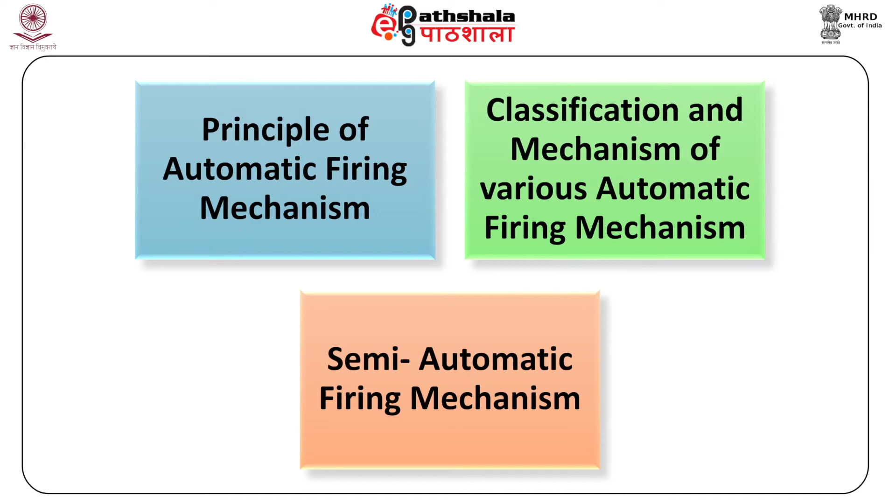After studying this module, you shall be able to know about the principle of automatic firing mechanism, classification and mechanism of various automatic firing mechanisms, and the semi-automatic firing mechanism.

In the older times, the firearms were muzzle loaders in which the projectiles were loaded manually from the muzzle end, and the whole projectiles, which were usually spherical in shape, used to coast out of the barrel and left no residual casings known as cartridge cases.

These initial weapons could have been little more than metal contraptions, being inept, sluggish to fire, and difficult to target. In addition, rain or humid weather conditions had an adverse effect on the priming charge, making it unmanageable to ignite. But as the development of firearms materialized, the cartridges started to be loaded by other mechanisms which were not manual.

The power to operate an automatic breech must obviously be self-contained within the weapon and comes from either the push of the recoil, that is, the direct utilization of the gas pressure on the head of the bolt, or the expansion of powder gases, and it is stored in springs for the performance of the counter-recoil and loading operations. Principle of automatic firearms.

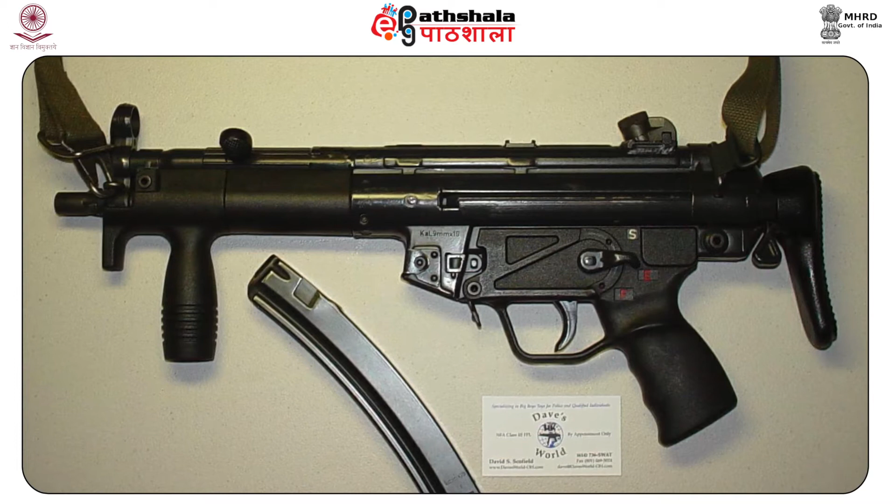As soon as the trigger of the firearm is pressed, it releases the hammer or the striker with considerable force. The striker compresses a pressure-sensitive material contained in the percussion cap. This generates a hot piercing flame which ignites the propellant charge. The charge quickly transforms into gas.

Due to limited space in the cartridge, the large volume of the gas so produced develops a very high pressure. The pressure so developed forces out the bullet or the shot charge through the barrel towards the target. While the bullet moves forward, the cartridge case is pushed backward. The case therefore comes in contact with the firing pin and the breech face of the breech block and picks up marks from the surface.

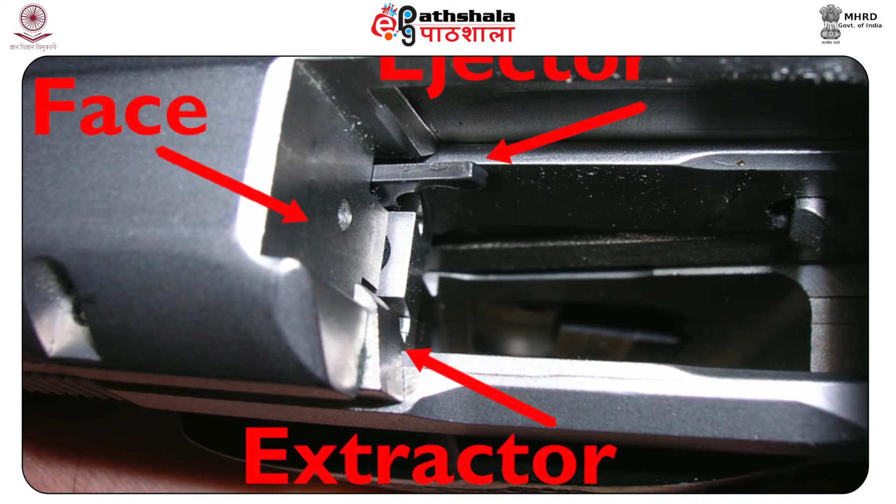The cartridge also expands due to the tremendous pressure developed in it, comes in intimate contact with the chamber, and sometimes may carry chamber marks. The fired cartridge case is extracted out of the chamber by an extractor and then ejected out of the gun by an ejector. In the process, both extractor and ejector are likely to leave marks on the cartridge case.

In a semi-automatic action, the mechanism automatically extracts and ejects the fired cartridge case and loads another from the magazine into the chamber, thus making the weapon instantly ready to fire another cartridge practically as soon as the preceding cartridge has been discharged, but does not fire it. To fire, the trigger must be released and then pulled and pressed for each and every shot.

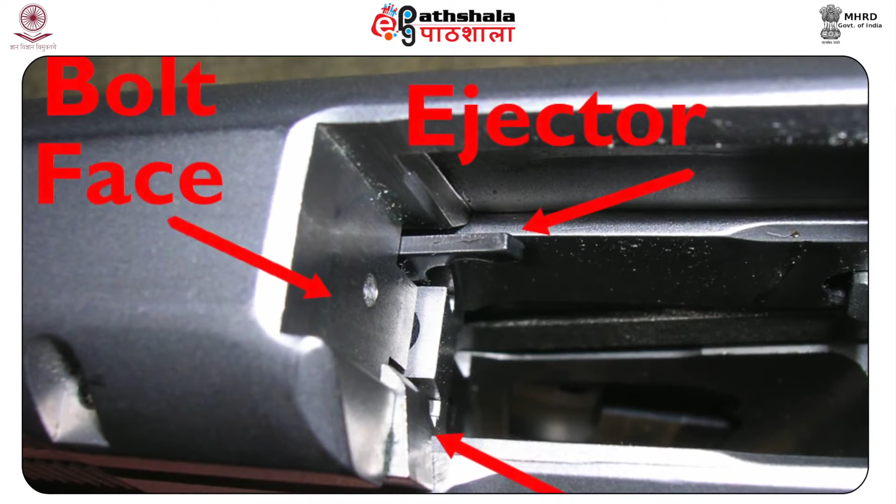On the other hand, an automatic action is one which continues to fire as long as the trigger is kept pressed. Thus, an automatic firearm is one that loads, fires, extracts, ejects, and reloads, continuing the cycle as long as the firing mechanism is held in the proper position.

Classification of automatic firearms. Blowback action mechanism. In blowback action, there is a heavy breech block. It moves backwards and forwards in a receiver attached to the barrel. It is not locked to the barrel.

There is a strong spring behind the breech block called the counter recoil spring or return spring. When a cartridge has been loaded in the chamber and during firing, the breech block is not locked to the barrel.

Before we discuss the operations of these mechanisms, let us consider for a moment the gas pressure inside the barrel. When a cartridge is fired, the pressure rises to its peak value. When the bullet is moving forward inside the barrel, the gas pressure goes on reducing, and when the bullet is just about to leave the barrel, the gas pressure is about one-fourth of the maximum pressure.

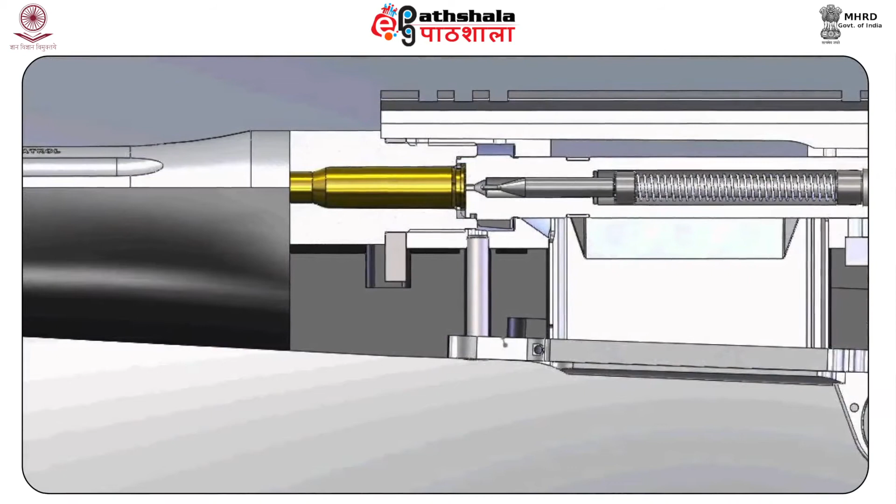When the bullet has just left the barrel, the pressure in the barrel reduces to 0, but for a moment there is some pressure inside the cartridge case which is called the residual pressure. In bolt action firearms, the bolt closes the rear end of the barrel and can be locked to the barrel during firing. But in blowback action firearms, the heavy breech block is not locked to the barrel during firing.

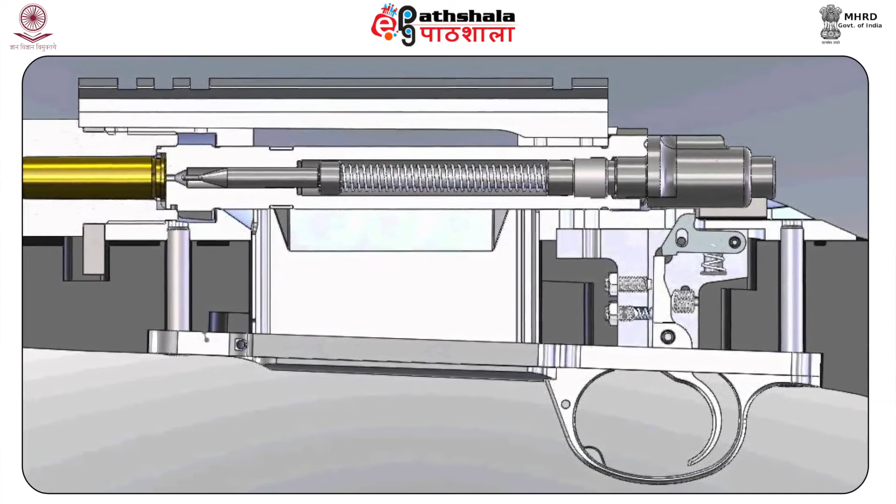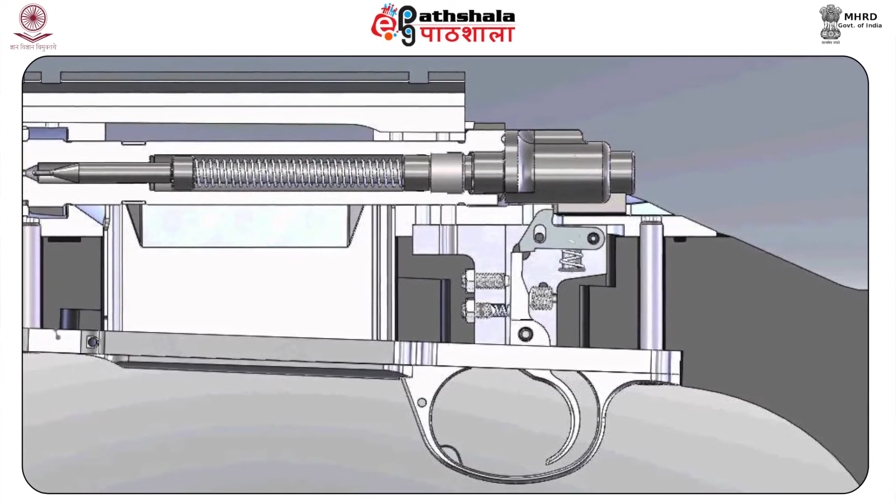When the cartridge is fired, the pressure acts in all directions. The pressure acting at the base of the bullet moves it forward, and the pressure acting on the breech block through the head of the cartridge case moves the breech block backwards. But this backward motion of the breech block is slow because it is very heavy in comparison to the bullet and because there is a strong return spring behind it.

By the time the bullet has left the barrel, the breech block moves to the rear, but a very short distance of about 1/8 inch. Now, when the bullet has left the barrel and the pressure dropped, the breech block continues to move backwards because of the momentum it has gained and because of the impetus of the residual pressure.

The fired cartridge case is extracted and ejected. If the firearm is hammer fired, it gets cocked also. The return spring gets compressed. It forces the breech block forward. When it moves forward, it takes a live cartridge from the magazine and loads it in the chamber.

If the firearm is semi-automatic, then the trigger has to be released and then pressed again for firing. But if it is fully automatic, it will continue to fire till the trigger is kept pressed or the magazine becomes empty. This action is employed in submachine guns.

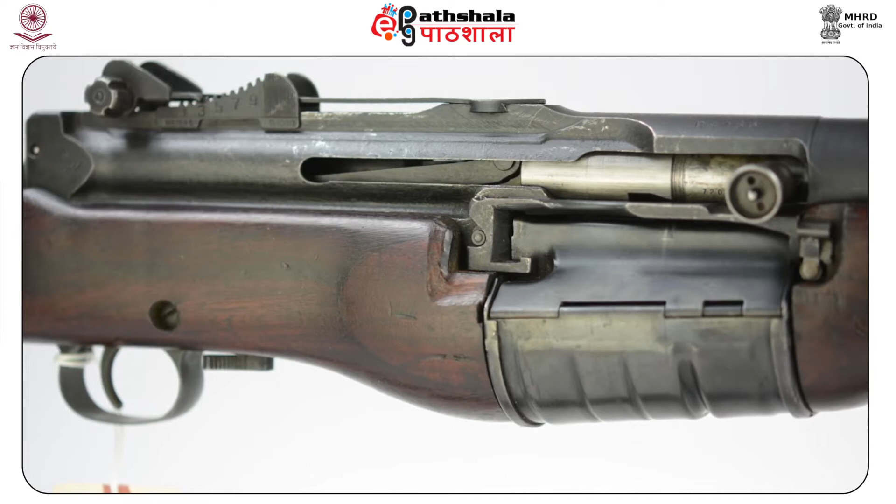Recoil operated mechanism. The recoil operated action is used in pistols. Here, the bolt and the barrel are firmly locked together at the instant of firing. When a firearm having this action is fired and there is high pressure inside the cartridge case, the barrel and bolt both move backward. After the bullet has left and the pressure inside the cartridge case has reduced to a safe value, the barrel and the bolt separate.

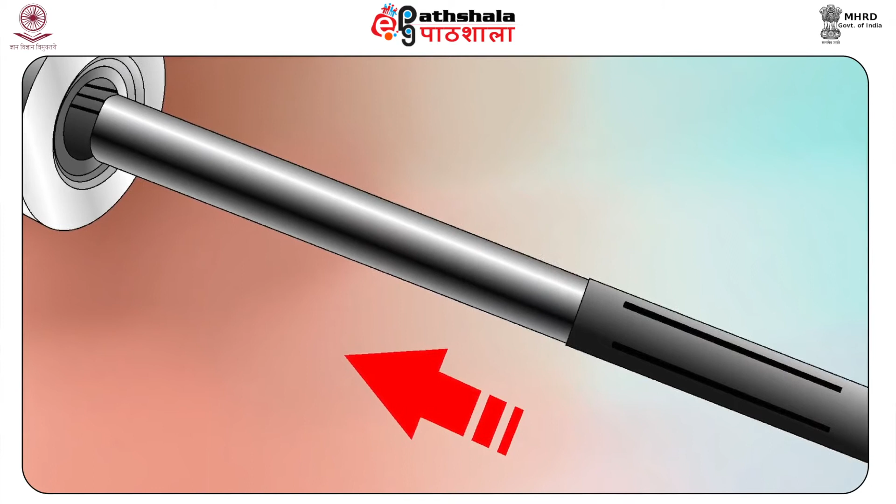The barrel moves to its original position, but the bolt continues to move backwards because of the momentum it has gained and because of the impetus of residual pressure of the propellant gases inside the fired cartridge case. The fired cartridge case is extracted and ejected.

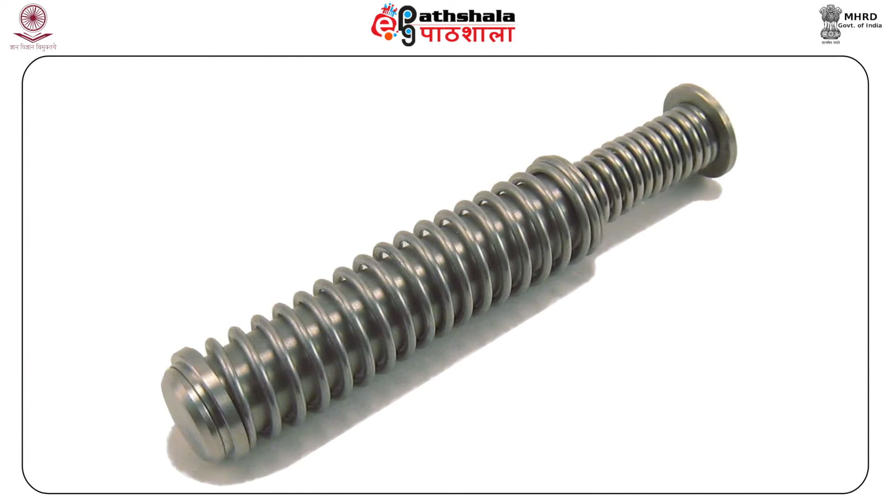Behind the bolt, there is a counter recoil spring. Because of the backward motion of the bolt, this counter recoil spring gets compressed and the firearm gets cocked also. The compressed spring pushes a cartridge into the chamber and the firearm becomes ready to fire again practically as soon as the previous cartridge has been fired. The recoil operated guns are of two types: short recoil operated guns and long recoil operated guns.

Short recoil operated action. In this type of mechanism, the breech block is locked tightly to the barrel. The barrel and the bolt are arranged to slide backward together on firing through a tube which encircles the barrel and a grooved well in the receiver. Thus, when the rifle is fired, the barrel and the bolt slide straight to the rear actuated by the recoil, during which movement the counter recoil spring is compressed.

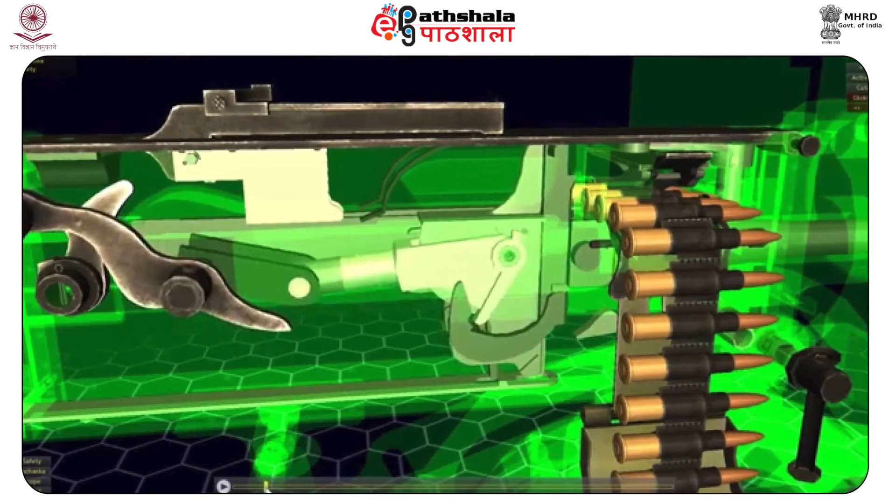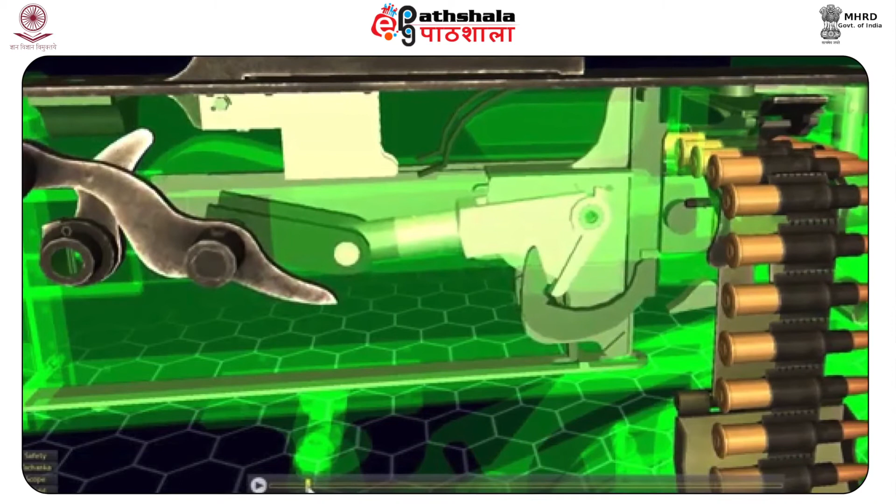When the barrel has completed a certain short travel to the rear and the bullet has left the muzzle, the barrel is stopped and at this point the breech block or bolt is unlocked from the barrel by cams in the receiver. In some designs, a counter recoil spring is provided for the barrel and the spring then pushes it forward again to its normal position. But the momentum and the residual pressure continue to move the bolt.

The compressed counter recoil spring then moves the bolt forward, carrying the top cartridge from the magazine into the chamber, and the bolt locks itself to the barrel, ready to fire again. Examples of this mechanism are .45 caliber Colt automatic pistols, Johnson rifles, LMG, Luger, P38 Walther and Mauser pistols.

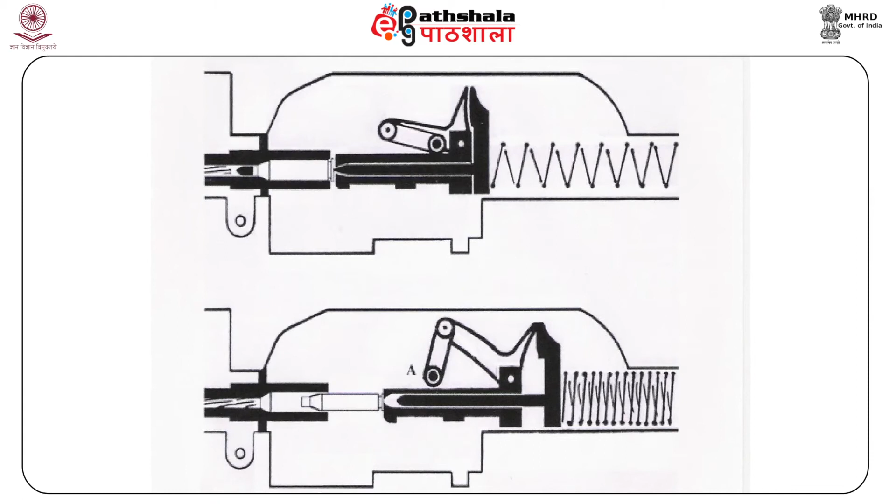The Johnson semi-automatic rifle is the most efficient utilization of the system to date when it is to handle high-power rifle cartridges.

Long recoil operated action. In this type of weapon, which is represented by the Remington auto-loading shotguns and rifles, the barrel and the bolt recoil all the way solidly locked together. As they do so, they compress their respective return springs. On returning, the barrel and the breech block are separated.

When recoil is completed, the bolt is caught by a catch. As the barrel begins to move forward, it is unlocked from the bolt, which remains held to the rear and which ejects the empty case. In this type of weapon, extraction and ejection occur as the barrel is pulled off the case rather than as the case is pulled out of the chamber.

When the barrel has almost moved fully forward, it trips the catch, releasing the bolt which comes forward feeding a new cartridge. The breech block and the barrel move backwards for a distance in excess of the cartridge length.

Thus in the case of a weapon firing a 2.5-inch case. The barrel movement is in the region of 3 inches. This is the principle behind the Browning self-loading shotguns.

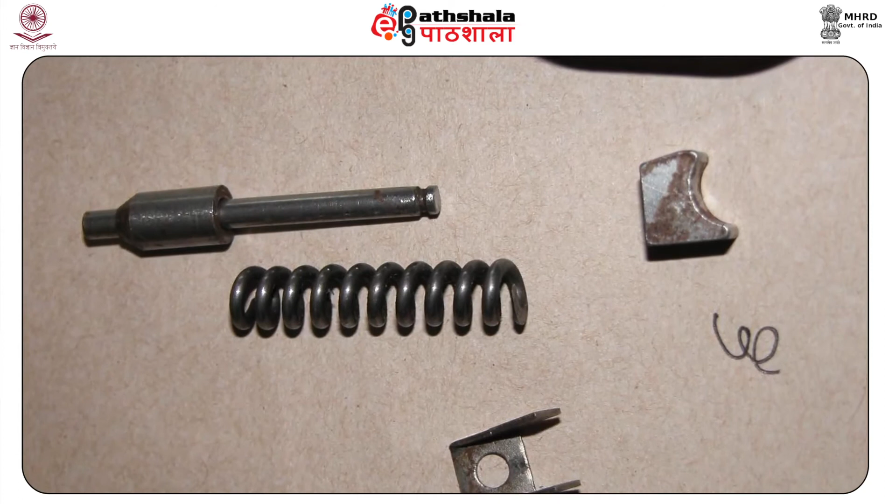The recoiling action is timed by regulating the weights of the barrel and breech block and by the strength of the spring. If the barrel is too heavy, it will have too much inertia. Its recoiling speed will be slow and ejection efficiency may be reduced. On the other hand, a heavy breech block tends to better ejection because it loses its momentum less than a light one after it has separated from the barrel.

Gas operated mechanism. This action is used in most of the high velocity rifles like AK-47, 7.62 mm self-loading rifles, etc. In this action, there is a small hole in the barrel which exerts pressure on a piston. The piston is connected to the bolt. The bolt gets unlocked from the barrel and moves backward when extraction and ejection of the fired cartridge takes place.

The counter recoil spring pushes the bolt forward, loads a live cartridge from the magazine into the chamber and gets locked to the barrel. The operating rod and piston also return to their original position. The firearm can now be fired if it is in semi-automatic mode, but if it is in automatic mode, it will continue to fire till the trigger is kept pressed or the magazine becomes empty.

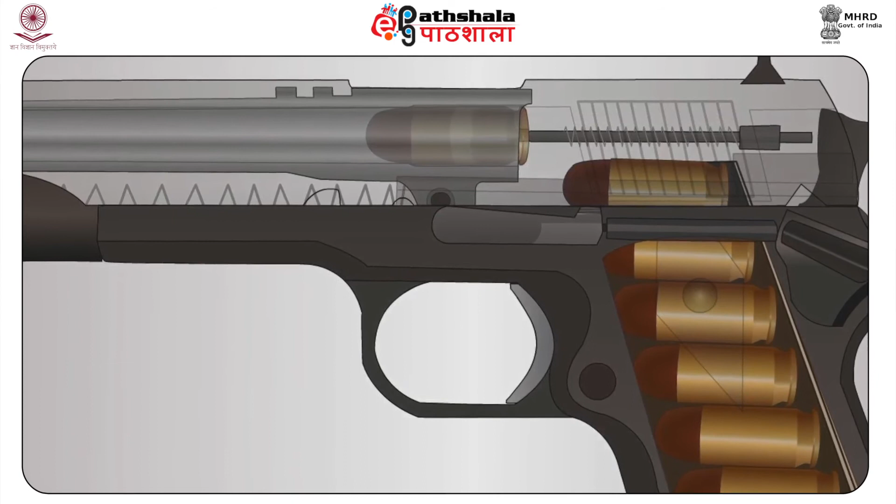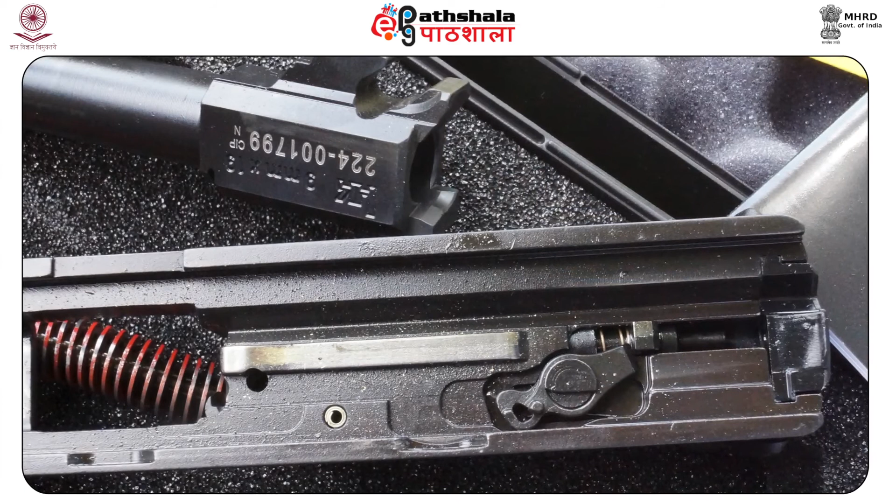The rod of this piston pushes back an operating rod which is connected with the bolt and a counter recoil spring. The operating rod first operates a cam to rotate the bolt and unlock its lugs by which it was tightly locked to the barrel, and then pushes the bolt back to its stop, extracting and ejecting the fired cartridge case, compressing the counter recoil spring and cocking the firing pin.

The counter recoil spring then pulls the bolt, operating rod and the gas piston forward. As the bolt moves forward, it pushes the topmost cartridge from the magazine into the chamber and firmly locks itself to the barrel ready to fire again.

Semi-automatic firearms. A semi-automatic or self-loading firearm is one that implements all steps indispensable to arrange it to discharge over again after firing, assuming cartridges remain in the firearm's cartridge feed mechanism. Characteristically, this comprises extracting and ejecting the consumed cartridge case from the firing chamber, recocking the firearm mechanism, and loading a new cartridge into the chamber.

Although machine guns and selective fire firearms perform the same tasks, semi-automatic firearms do not automatically fire an extra round until the trigger is released and pressed again by the individual discharging it. That is, a semi-automatic firearm fires only one round each time the trigger is drawn, while all elementary firearm actions necessitate the action to be cycled manually before the next round.